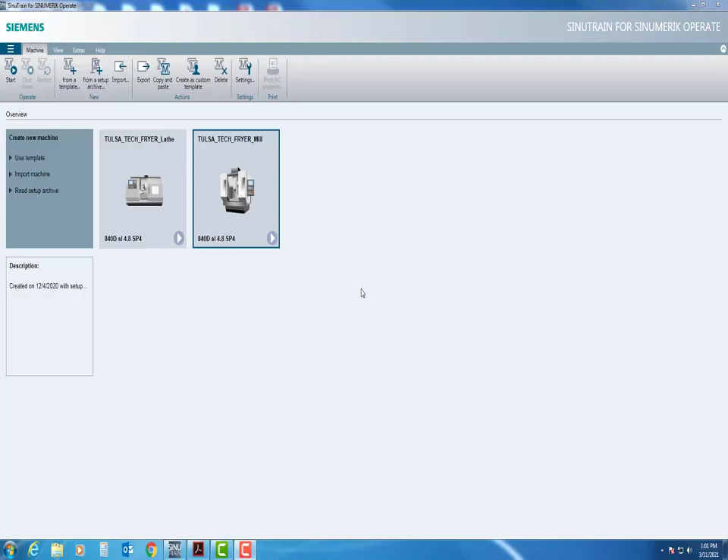Hi everyone, this is Aaron Ruck, and today we're going to go over how to use the Shop Mill Programming function on our fryer mills. This is how we're going to work towards getting our final stage in getting our Siemens certification.

We're going to open up our mill, and it will just take a second to load. To make this quicker, I've already created my tools - tool 1, 2, 3, 4, 5 - and I have the diameters right here. If you don't have this set up, that's fine, just make sure you have it set up before you start programming. If you have them labeled as different tool numbers, that's also fine. Just make sure whenever you go to start picking everything that you have them picked as the correct items - don't try to end mill with the drill, because it will do what you tell it to do.

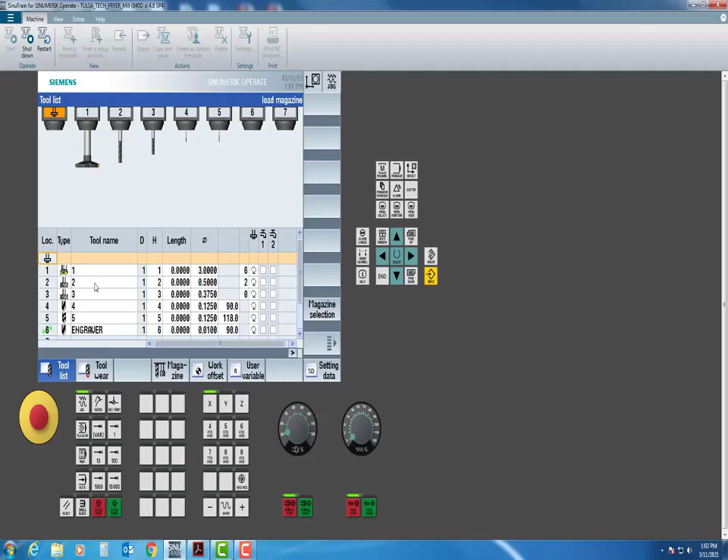Also, to help with the simulation, if you look at the work offsets, you'll notice all these lengths are 0. If I go into the work offsets, you'll notice I did put a minus 10 inches - I'm going to take these out. I'll show you why those are important later.

With that said, I'm going back to my program manager because we are ready to start programming. Remember, this is a shop mill, so this is a Siemens hand programmed program that we're going to be using. The first thing I'm going to do is create a new folder - we'll call this the name of my print, 8M, and we'll say OK.

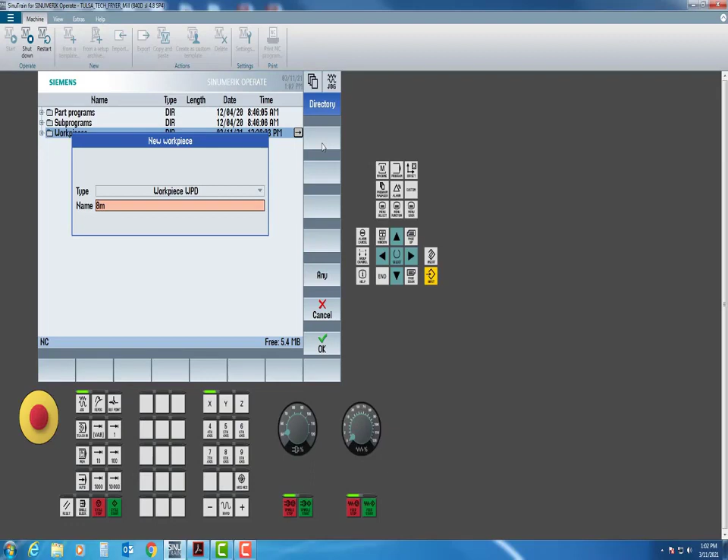Now if I look at my print, this is what we're going to be hand programming. 8M is what we're using, that's why I called it that. We've got several things we want to look at. The first thing we're going to do is build that material. If you'll note, I have 4 inch by 4 inch by half inch material, and the top of it is going to be minimum cleanup.

So this is what my part's going to look like right here, except if you'll notice on the front edge, I'm going to need to cut into the part right here and on the side, because that's what I want it to look like when it's completely done. I want to make sure all surfaces are machined. So back to my simulator.

If you'll notice, this did open up my material to make. I'm going to click on Graphics View, deselect it, and put these to 0 - it'll make sense a little bit later as to what's going on with those. But the first thing I want to show you is whenever I'm creating my block of material, I want to start off at X0 and Y0.

This is going to be 4 inches, that's going to be 4 inches, just like my print said. And then the top of my part is Z0, and the thickness of my part going down is going to be a half inch. Now if you put that as a positive half inch, that means it's going to build it this way, which means your simulation is not going to look correctly.

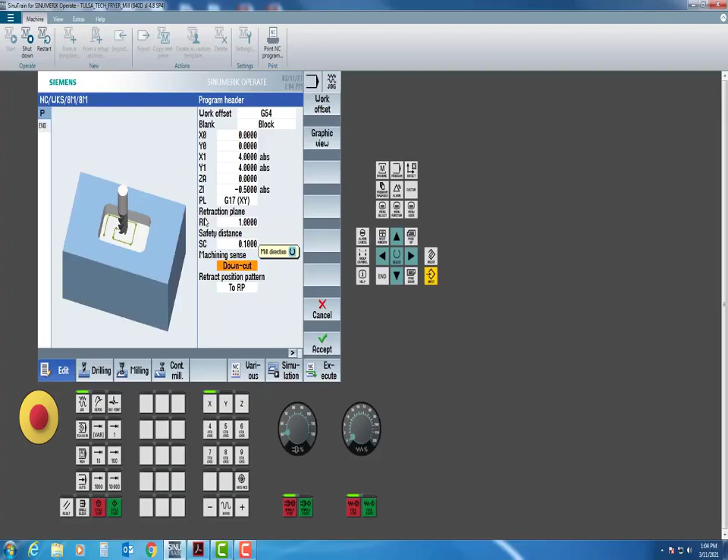So I'll hit enter. We are going to be using the G17. Retraction plane of 1 inch, safety distance plane is going to be 100 thousandths. We are going to be machining into the part, and we are going to use a retract position before going into a new location. So with all that said, I'll hit accept.

The first thing I want to do, if I go back to my print, is go ahead and face my part. And then after I face it, we'll go ahead and start working on the profile.

So we'll go back to my simulator, and then I'm just going to go up to milling. The first thing I want to do is a face mill.

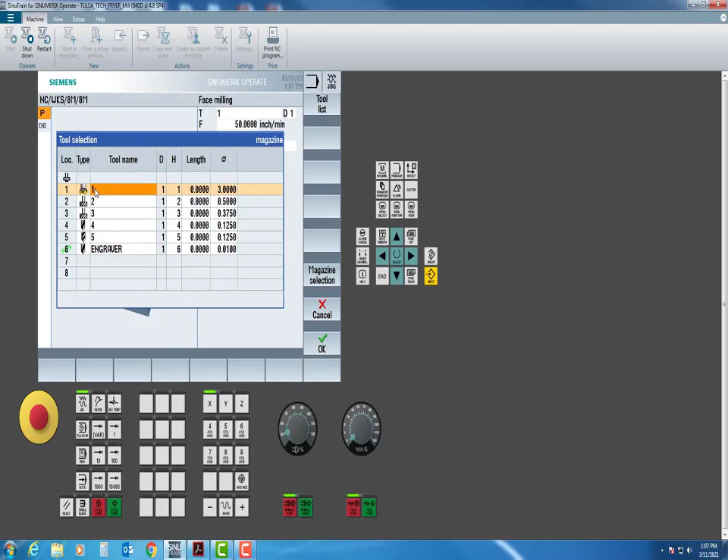Now when I click on these, a lot of this stuff is already going to be filled out. Whenever you open up yours, there's going to be a lot of default settings in here, so I will go through them as if it was set to default. So for this first tool, I'm going to hit select tool, and I want my facing tool to be what I'm using, so I'll hit OK.

I'll arrow down and I'll put that at 50 inches a minute. 3,000 RPM sounds pretty good.

Now right here, if you'll notice, that says finishing. Now if you have a lot of material to take off, you can do a roughing and have it step down so far. However, we are just milling to minimum cleanup, so a finishing pass will be just fine.

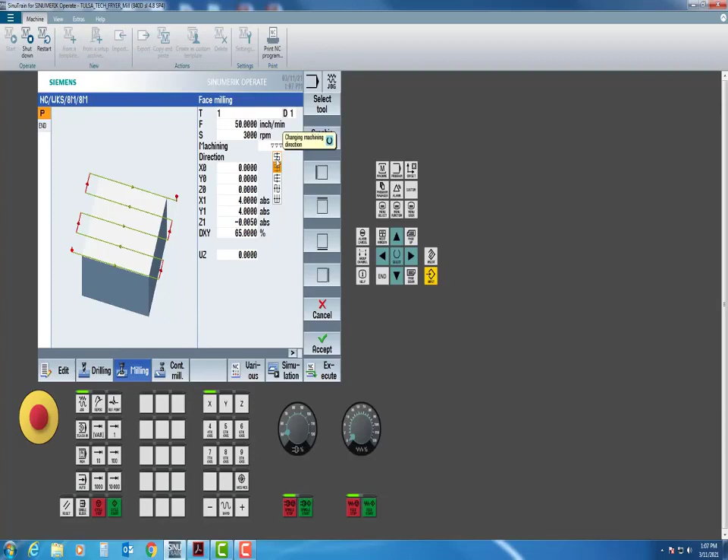Right here you can control how the tool paths look. So the first one that comes up will work just fine, and then I'll arrow down.

So right here, for the center points in X and Y, I usually don't change anything. For the Z0, I don't change anything. I let it know that the furthest point in X is 4, just like when we were setting up the material, and the furthest point in Y is also 4 inches.

If you'll notice, this will probably come up 0, and these will be red. So for example, you would see something like that. Well, with Z0 being the top of my part, for simulation purposes, I'm just going to make that minus 5 thousandths. So you notice that does go back to white because the machine doesn't have any logic interference.

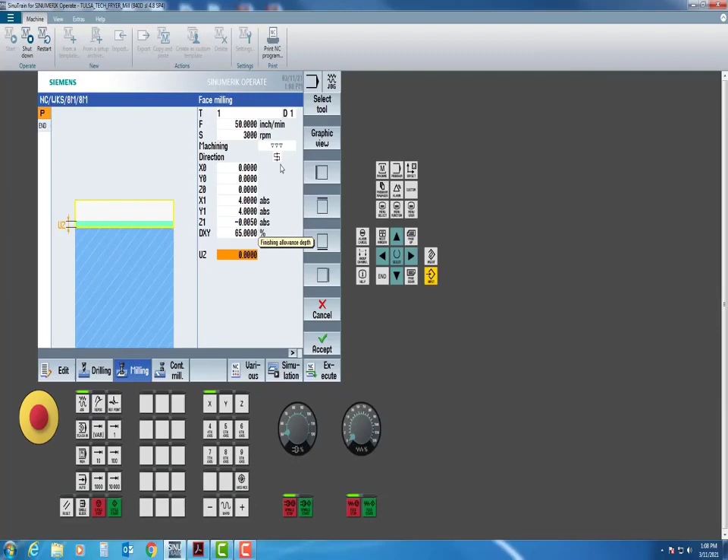It'll be doing a 65.0000 step over, or 65% step over, and I'll leave everything right there. So finishing allowance, I'm not worried about it because I'm going to finish it all at one time.

I will hit accept, and the first thing I want to do after I complete anything during this programming is I just want to simply simulate it.

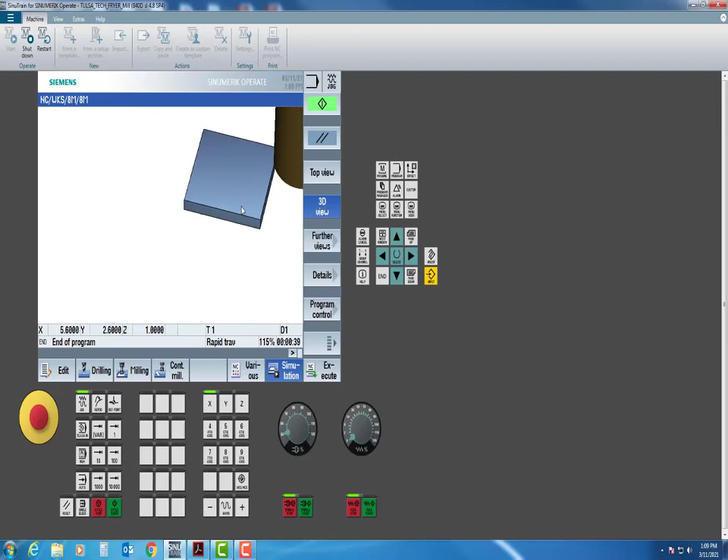So when it comes up, you'll see the part will come up in a top view. If you want to, you can click 3D view, and if you hold your left mouse, you can pan your part around. For your roller, you can zoom in and zoom out, and your third mouse will rotate your part. So you can do with that as you please.

I usually like to go into 3D view. When you're done with your 3D view, simply hit simulation again. So with that said, it's looking pretty good.

So if you haven't printed off this print, now would be a good time to do so, or ask for the print, because I'll be going through it a little bit quickly. I won't be coming back and forth as much, but just in case, if it helps you with keeping track.

And keeping up. So the first thing I'm going to do is I'm going to make this profile. I'm going to start at this location, and then I'm going to go step by step all the way around my profile. I'm actually going to tell the machine what each pivot point is all the way until my profile is closed.

So back to my simulator, I'm going to go into contour milling, and I'm going to create a new contour. And we're just going to call this a boss because that's what it is.

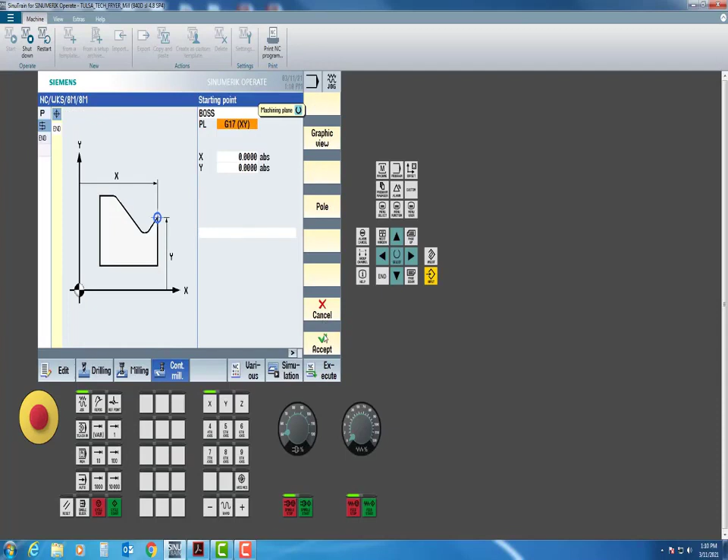And then I usually don't worry about the views for here. It's just going to let me know that my starting point is XY0. I will hit accept. If you'll notice, I am at the bottom left corner. That's my 0 and that's my 0.

First thing I want to do from that position is I want to go up in Y 3 inches 937 thousandths. And then I'll simply hit accept. So if you'll notice, it put me up that high, and that's how we're going to do this all the way across.

So this next point, we'll go 3 inches 937 thousandths. But if you'll notice, there is a radius there.

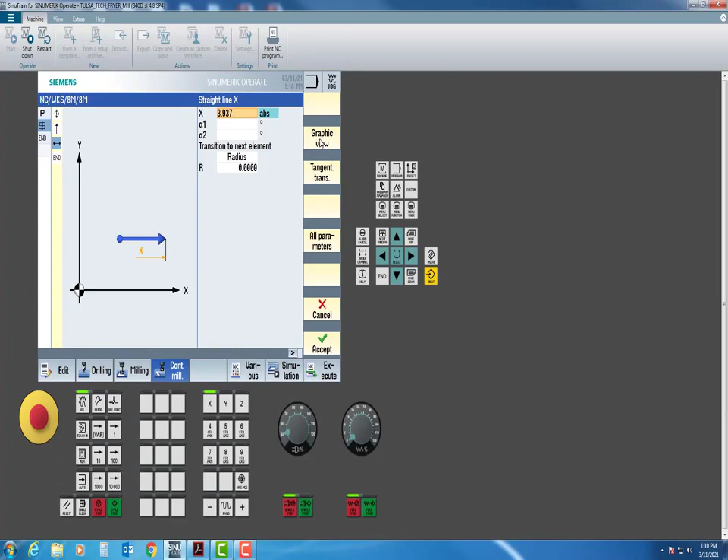So this is what's cool about hand programming on a simulator, is I can subtract 1 inch 181 thousandths and hit enter. And then when I go to accept it, you'll see that it did stop it short of the amount that it needed to be stopped. It went to 3 inches 937 thousandths and then subtracted 1 inch 181 thousandths, which gives me this current location. I like that, so I'll hit accept.

From here, I'm going to be doing a radius. Now, if you'll notice that this is not the radius I want, that would be a counterclockwise, and I want to go a clockwise direction. So simply click on this, select the right location, and I'm going to do this a certain way. There's more than one way to do it. This is just the first way I'm showing you guys, and I find it to be the easiest for what we're doing.

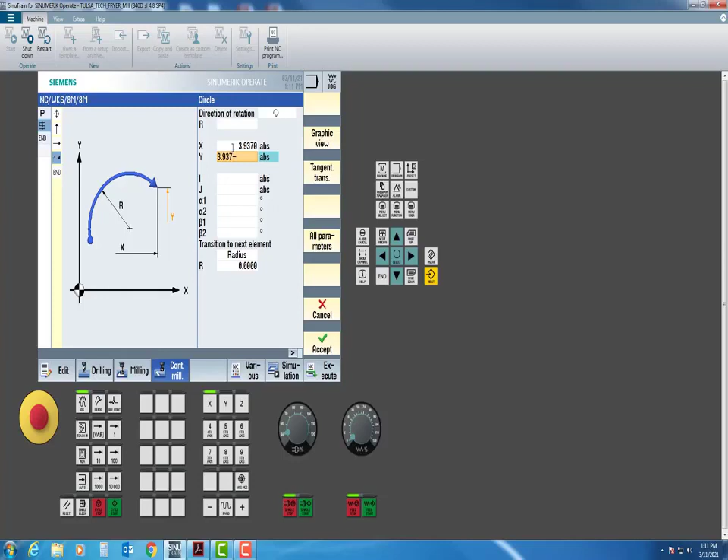I'm going to come right here and say 3 inches 937 thousandths is where I'm going to end at. Right here is going to be 3 inches 937 thousandths. Again, I'm going to subtract the radius and then hit enter.

Now nothing's going to show up until I hit that right there. I'll click on graphics view, that way it will show me that it does this radius. Until I hit that, it just puts my location right there. That's my end location, but by hitting my tangent, it swings that radius the correct direction to the correct position.

So I'll hit accept, and I'm going to move down. Again, I'm going to move to 984 thousandths plus that radius of 312 thousandths. I'll hit enter. So from here, I want to do another radius.

Go the right direction. I'm going to type in my endpoints. My endpoint X is going to be 3 inches 937 thousandths minus 312. Now this will be 984 thousandths. And then when I hit tangent, it does swing it.

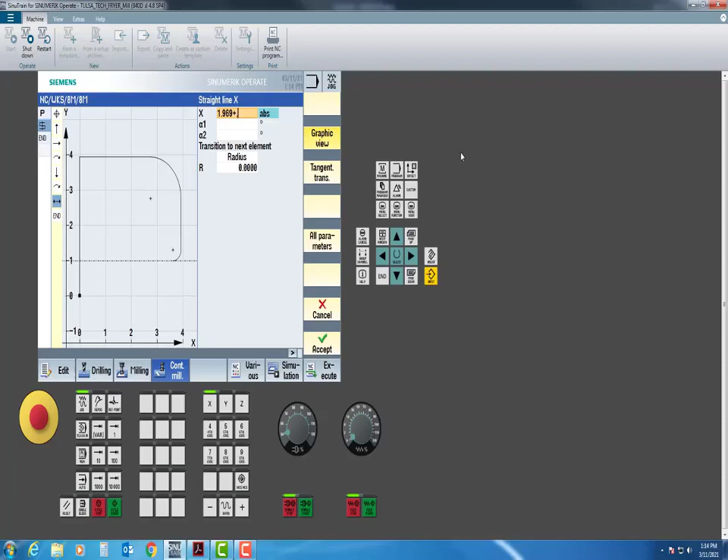Now from here, I'm going to go 1 inch 969 thousandths plus 0.312 thousandths. Enter, hit accept. And now this time, whenever I swing it, it is going the right direction. So I will simply put in the 1 inch 969 thousandths, and then the Y will be 984 thousandths subtract 312 thousandths, and you'll see it puts my endpoint right there, and when I hit tangent, it does swing it all the way down.

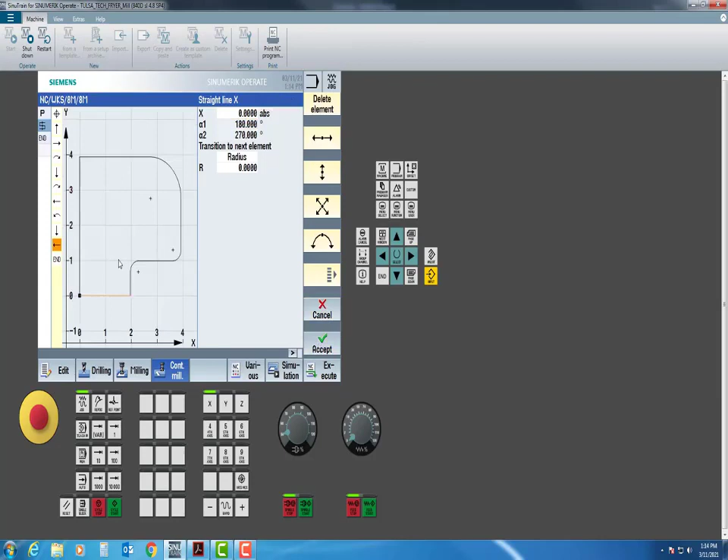And then from here, I'm just going to go back to Y0 and X0. And if you'll notice, this has done my entire profile. So from here, I'm going to hit accept because I have finished my boss.

Now that I have a contour, I want to go ahead and create a tool path. So path milling - I'm going to be using a tool, so I'll select tool number 2, which is a 1/2 inch end mill. And then I'll come down, 50 inches a minute looks just fine. 4,000 RPM sounds good. Now right here, notice how it does have the finishing symbol.

I want to use this for roughing. I do want to be going forward. Now keep an eye out for this right here - this radius compensation is to the left of the line. You have several different options.

I'm doing the profile, but if I wanted to cut on the inside of the line, I would select that right there. So by default, it comes up using this symbol, which will cut on the left side of the line. So my Z0 is the top of my part.

My depth of my profile, if we come back and look at it, says 150 thousandths deep. And then I want to take 50 thousandths depth of cut each time. I'm not worried about leaving anything for the finish allowance.

In Z - now on the plane, for leaving finish allowance on the sides, I'm going to go ahead and leave 10 thousandths. That way it gives me a nice finish cut, which is really easy to program because we have this ability. So I've got an approach point.

Now keep in mind, this approach point means it's going to start 500 thousandths off to the left, and then when it retracts, it's going to come off again 500 thousandths off to the left, okay? Or down, possibly, whichever one that default selects right here. Now keep in mind that this will have to be changed later on, and I'll show you why. It won't have to be changed in this path, but it'll be changed in something else.

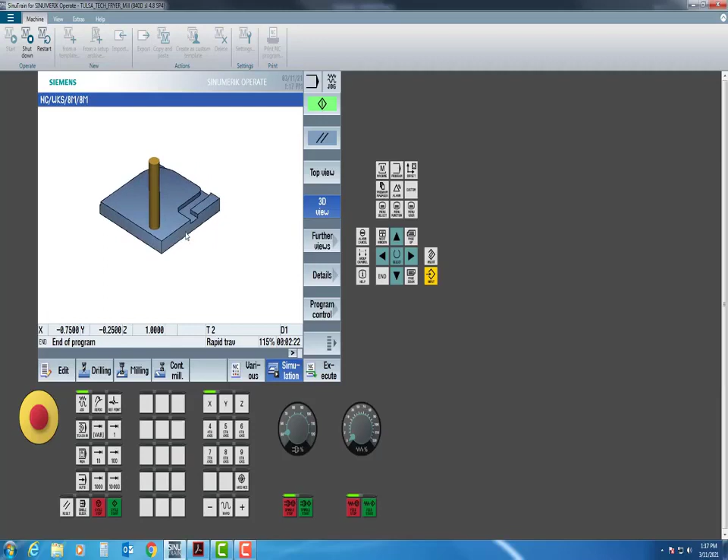Now of course it will simulate the face, and then it will start simulating that boss. One thing I want to point out is that it does look just like the blueprint. It is not cutting on these sides. However, I must have machined surfaces all the way around the part, and I'll show you why what that's going to look like here in a minute.

So I'll move that back to the middle. I'll turn off simulation. Now if you noticed, I'll turn this on one more time so I can point out what I'm looking at.

If you look right here, I have some material that's been left over from that end mill, and a big chunk of material right there—I'm going to call that excess. So I need to make a toolpath that will get rid of this excess material.

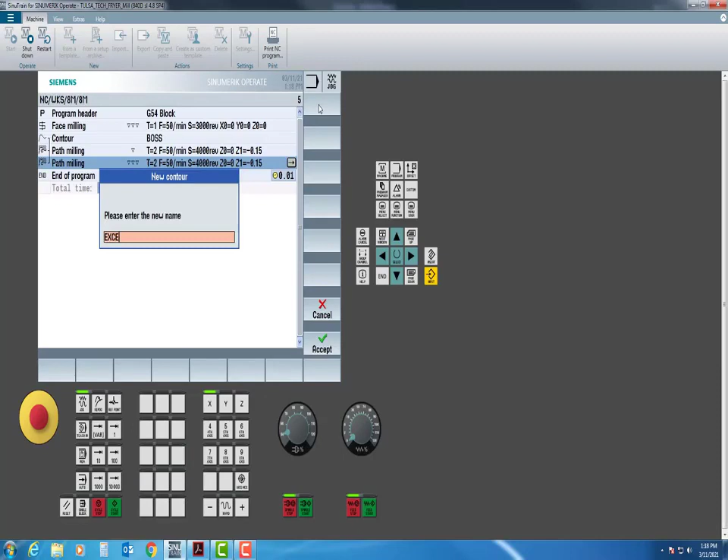Click off of simulation. I want to go to contour milling. I'm going to make a new contour, and then I'm going to simply select excess. We'll call it that right there. Notice how it wants to start right there at the bottom left.

However, I don't want to come down at the bottom. Looking at our blueprint, I'm going to tell it to come to X 4 inches, and I want it down right here because I don't want it to come down on top of the part. The goal is for my toolpath to come up, over again, far enough because I'm going to move up here to click that off. I'm going to put my tool right over the top of that right there, and by doing that my tool by default will take that off.

So we'll come back to our SinuTrain. My starting location is going to be 4 inches, and I want to start at -1/2 inch right there, so that way I know my tool will be completely off the part. I'll hit accept.

So now that I have my starting location, there's my home. There's my starting location for this new profile, the new contour. I'm simply going to move up, and it's up to you to figure out the numbers—I'll let you figure it out.

I'm going to come up to 300 thousandths, and then I'll hit OK.

Now here's something that's cool. Usually what I do is I'll type in these locations because they are known locations, and then I'll subtract half the diameter of my tool, or a little more. That way it puts me in a good spot—there's no guessing, I know what's happening.

So again, I'm going to come over 1 inch, 969 thousandths, plus I know 250 thousandths is half the diameter of my tool, so I'll go 300 thousandths. That way I'm 50 thousandths away from actually cutting that profile that I just made. That might sound confusing right now.

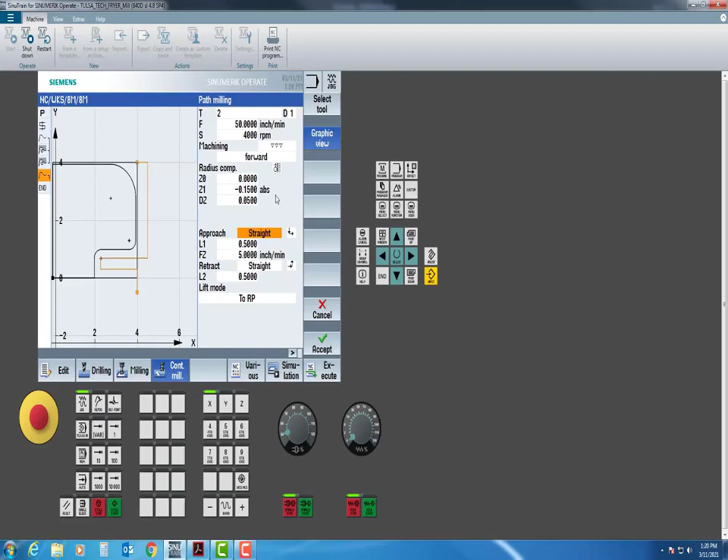We're not going to change anything right now. I want you to see what it looks like if I don't change that symbol. I'll hit accept, and we will simulate. Again, the first thing it will do is my facing, and then it's going to do my finished pass.

If you notice right there, it's cutting way far into the part. Now, it's doing that because I told it to cut on the left side of the line, so by doing that it goes further than what it's supposed to. This is an easy fix.

I will go back to what I'm doing. I can either hit the right arrow on my keyboard or I can click on it—I didn't cover that earlier. But now I don't want it to stay on the left side of the line. I want to do center line programming. So I'll select that, and I'll hit accept.

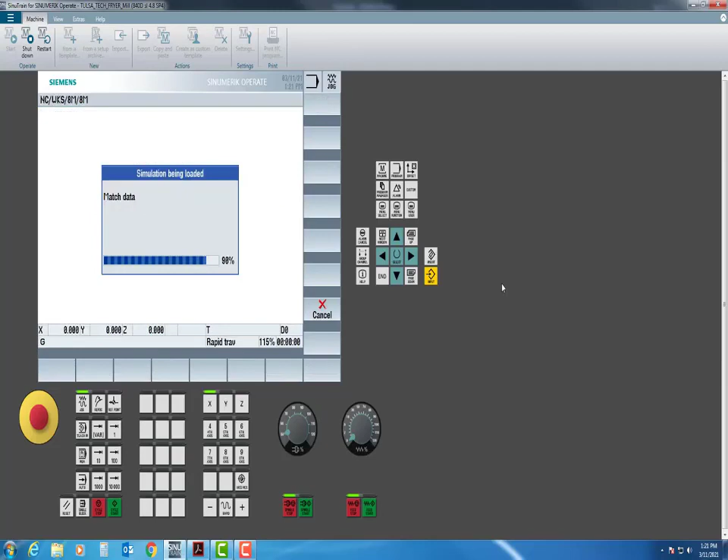So this time it will not be cutting on either side of the line. It will be cutting exactly where I told it to go. So it's going to do its finished pass.

And just like that, it's cut it all away. But if you'll notice, it did two more things: it did not cut everything right there, and it did cut into my profile. So we got one more thing to look at.

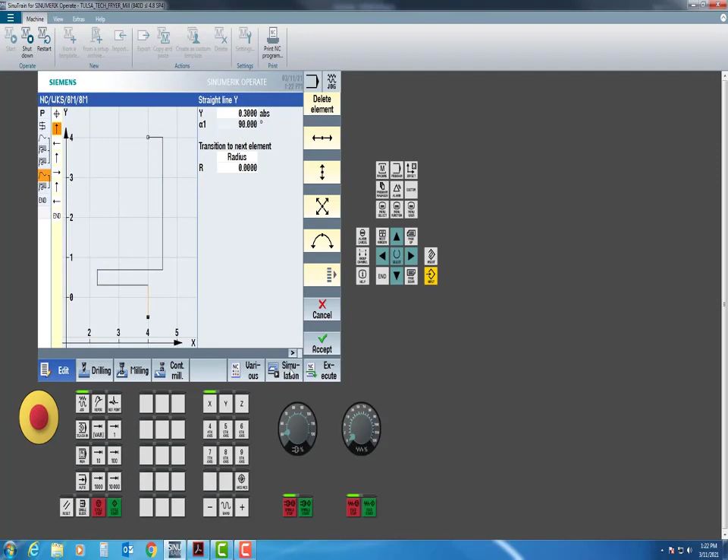So I'll hit simulation again. On this contour, this first move, I'm going to arrow up to each point of the contour. That first move was 300 thousandths. Remember, it's a half-inch tool, so 250 thousandths is half the diameter. So if I move 300 thousandths, that lip we left was 50 thousandths thick.

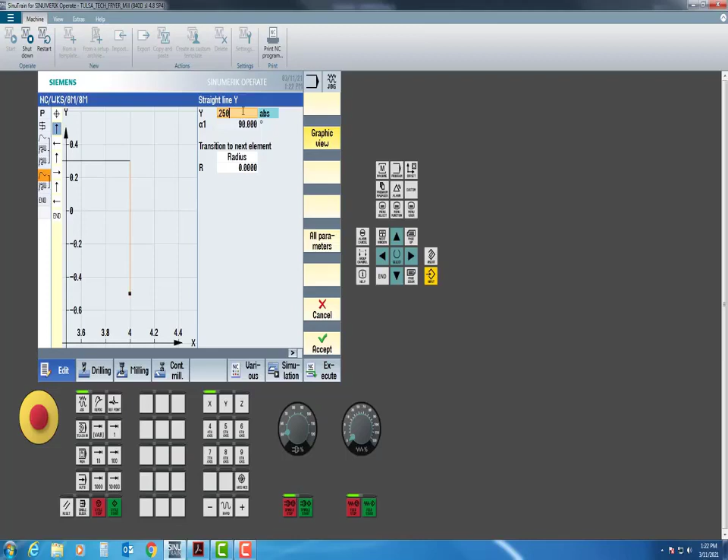Easy fix. I'm going to come in here and also make that 250 thousandths. If you wanted to, you can make it 200, or anything less than 250 thousandths, and that would work just fine. Okay, so that looks really good.

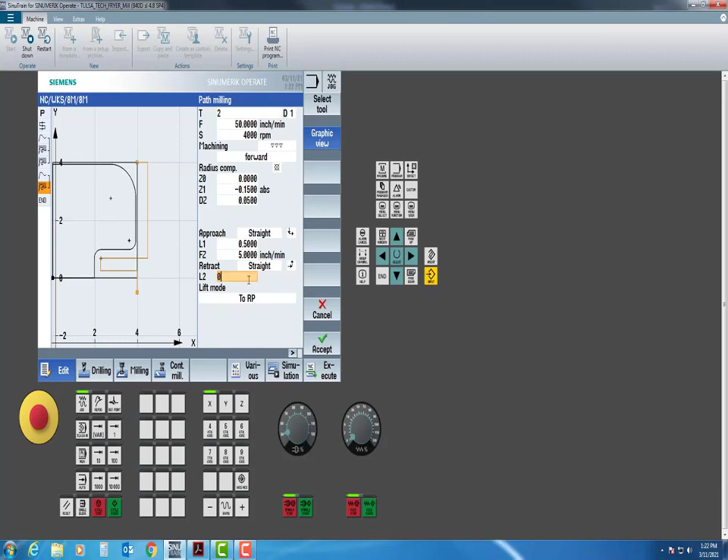Now the next thing I want to point out is it cut the top of this profile right here. Remember I told you about that approach and retract. What's happening is it's completing the move, but for the retract out, it's moving an additional half inch to the left. So all I'm going to do is make that a 0, hit accept, and let's simulate one more time.

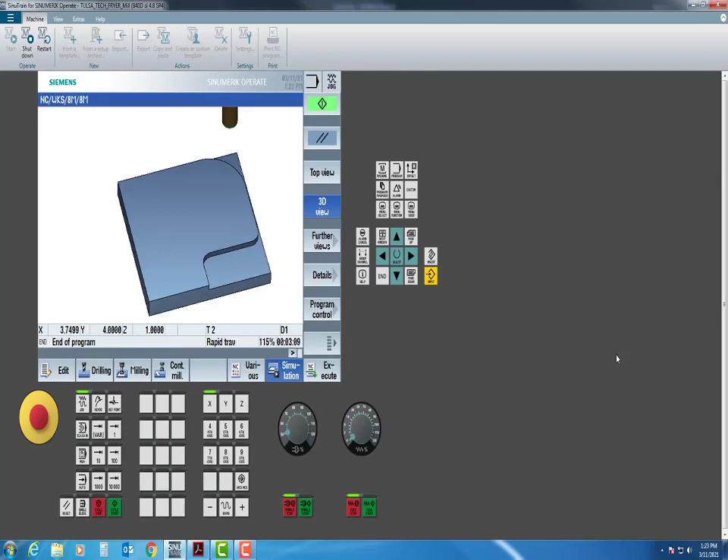When you are making your parts, you will run into a lot of miscellaneous functions or errors. The key is understanding how everything works on your simulator. That will help you define your profile and get everything working just fine.

Alright, so that looks really good. It's not cutting into it. Now the next thing I told you is that I want to cut all the way around the profile.

So I need it to cut into here. On my setup, I usually tell people to go in about 30 thousandths on both sides. That way I can keep 30 thousandths clean up over here and over here, so it keeps everything nice and even.

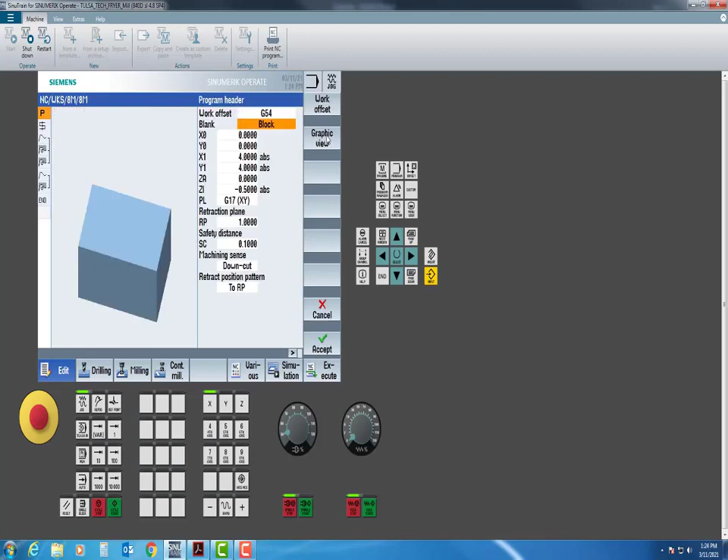But to do that, I'm already pretty far into my programming. So I'm going to come all the way back up here to my block header, and what I'm going to do is move my material down and to the left of the starting point. Keep in mind, this corner, I have it programmed to X0. So imagine that profile being inside here — I am moving this block of material down and to the left of that starting point.

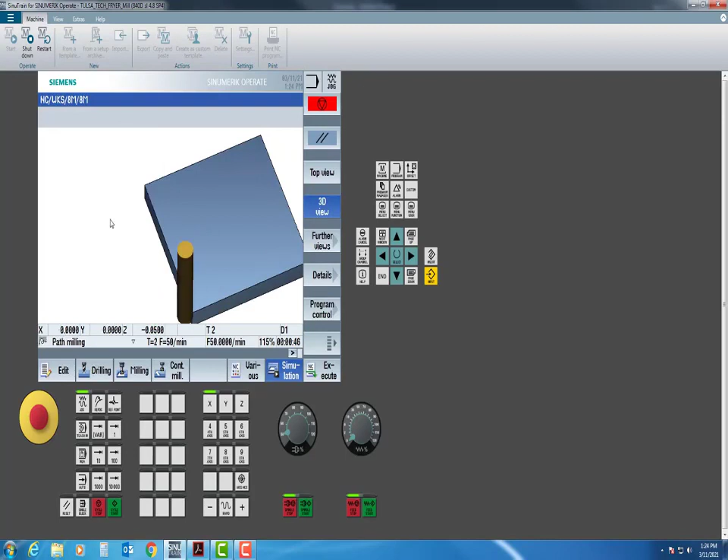So I'm going to hit accept, and I'm going to simulate one more time, and you'll see what that does. So now you see, the profile has not changed, my paths have not changed, and it cuts on both sides right here.

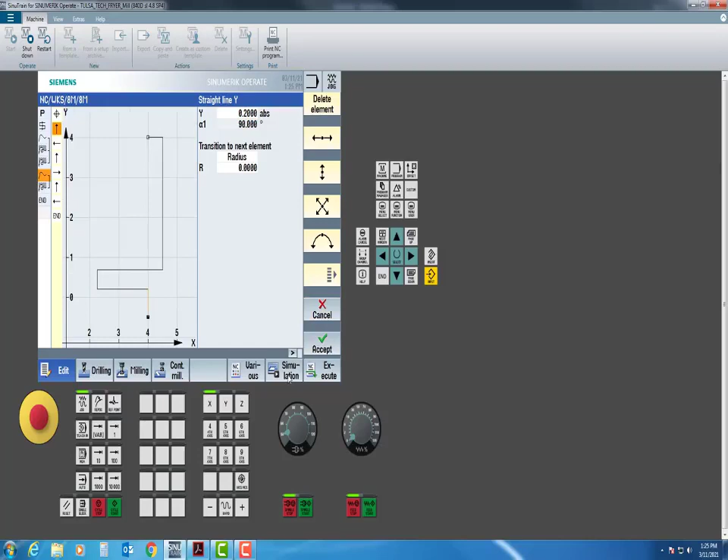And again, anytime I change something, I want to simulate it. This will help prevent frustration later on in the program if you get everything right step by step. So again, I am cleaning up right here — my excess now takes off everything on the top and bottom.

Now, the reason why I have so many of these errors in here is because I want you to see what an error looks like, and I want you to know how to fix it and see that it doesn't take very long to fix it. So we're done with the profile and the facing, and we're not that far into it.

So what I'll do is move my cursor where I want it to be, and I'm going to make a pocket. From here, I'm going to click Milling, Pocket, and I've got this square right here, but I need to put it in the right location. Again, we're going to go to Simple, select the tool — it's going to be tool number 3, our 3/8 end mill. And 30 inches per minute looks good, 6,000 looks good, and I'm going to change this to a roughing.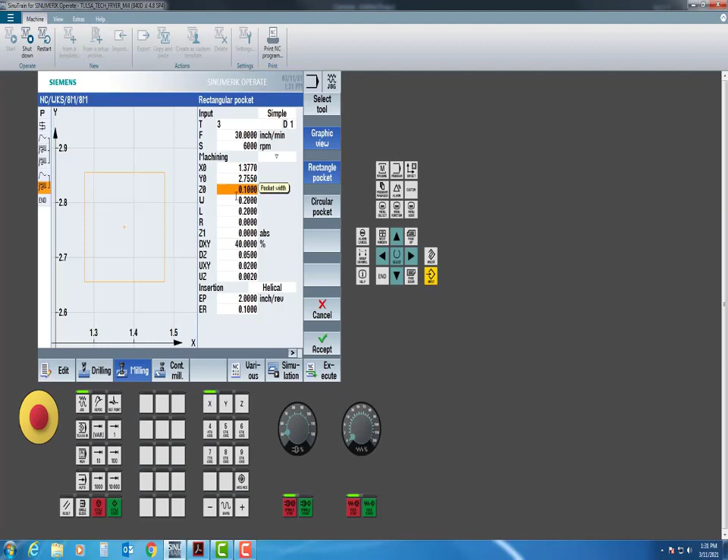So the first thing it wants me to do is put in those locations. This location is going to be 1 inch, 377 thousandths, and on the next one, 2 inches, 755 thousandths, and that has my location. Then from there, I'm going to put in my Z0 at 0, because that's the top of my part. Now the width of this pocket is right here at 1 inch, 968 thousandths and 5/10.

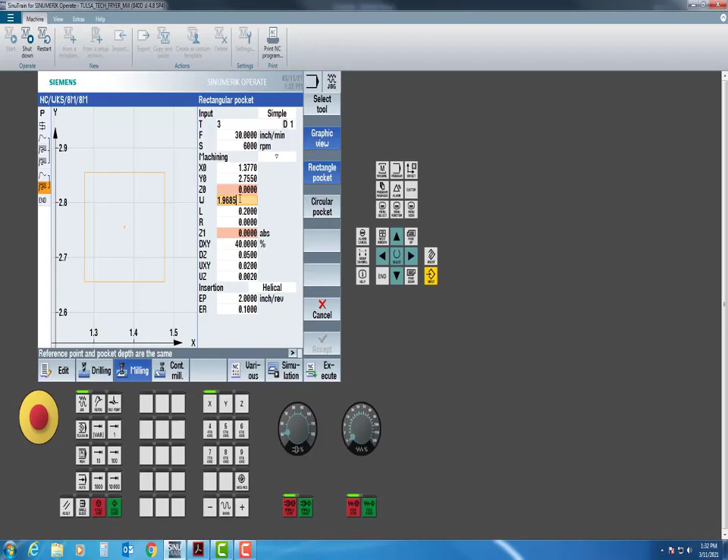So we'll type that in because that is the length and the width. I'll type in 1 inch, 968 thousandths and 5/10, and again 1 inch, 968 thousandths and 5/10.

Now you can see on the screen it looks really good. It actually positions it where it should be with the graphics view selected. So from here, I want to tell it how far deep to go.

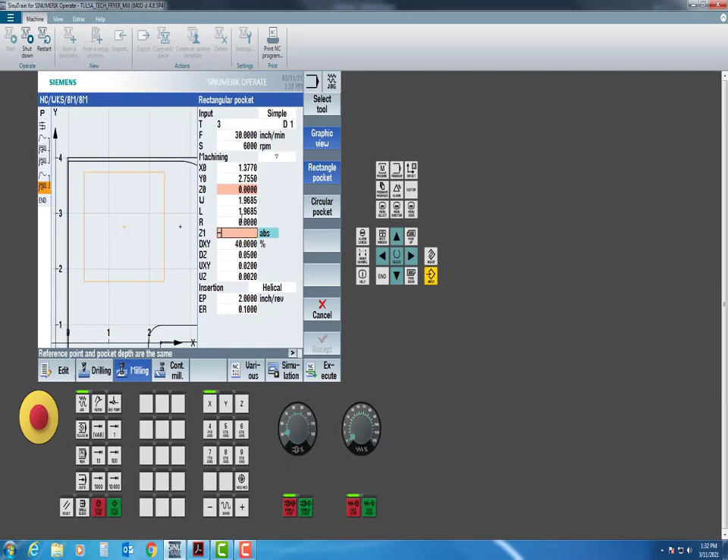I have a radius on there, but I'll come back to that in a second. I want this to be minus 196 thousandths, because if I look at my print, that's how deep the pocket is. Now also on the pocket, I can put a radius on all 4 sides, and in this case it's going to be 312 thousandths. So if I click on the radius, 312 thousandths right there. So now I have my positioning, my length and my width, my radiuses, and my depth.

From here, you'll see that I'm taking off 40% of the cutter on the step overs. I'm going down 50 thousandths depth of cut for each pocket pass. I'm going to leave 20 thousandths along the walls, and 2 thousandths on the floor.

Now here's where you can have some fun if you want. I've got a vertical zigzag, I've got a helical zigzag, and I've got this last one. I'll let you guys look at that and see what you think about it. But I'm going to use the helical. I've got 2 on my inches per revolution, on the pitch, and then I've got 100 thousandths on the helix radius.

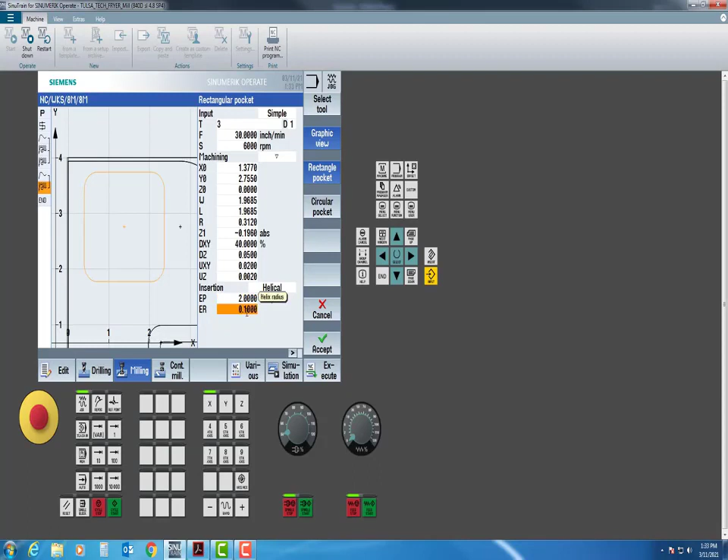Okay, so I'm going to hit accept and simulate. Now of course, unless you've changed anything, your facing and your profile should all come out looking just fine.

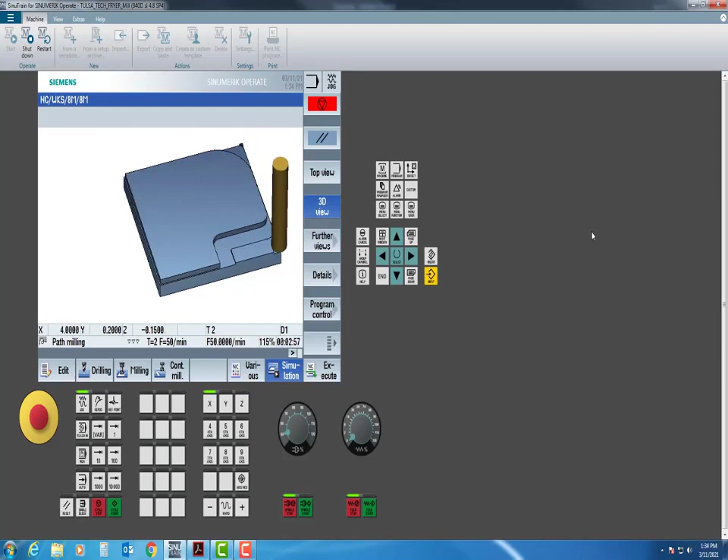I'll make sure that I am still profiling around the outside. I'm cleaning off the excess, and now my pocket will start. That is a 50 thousandths depth of cut each time, so it will do it 4 times. Should be number 3. And on the 4th one, right there. So now you got to remember, pocket's not done yet because we just roughed it out.

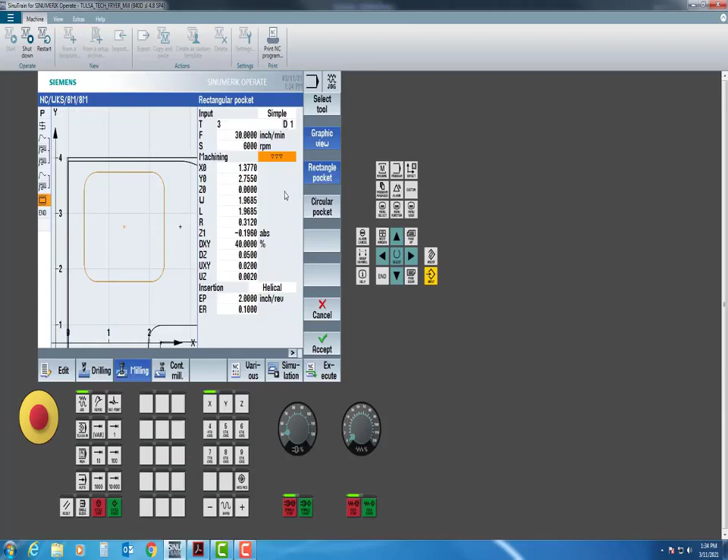So I'll click on simulation. I'll simply come back to rectangle, and then I'll click on here and I'll click finish. Now when I click on finish, all I'm going to do is hit accept, and now these two are tied together. So I'll hit simulate.

And if you want to, you're always more than welcome to speed up your simulation. I've got it at 115%. If I go to 120, it will go so fast that we can't see what's happening.

So I've got my first pocket depth. Should have the second. And then I've got my 4th pocket depth. And then I've got my finished pocket depth. And on the finished pocket depth, you can make it go 50 thousandths at a time, or you can go ahead and just make it do all of it at once.

So that was my rough and finished pocket. And now I have left, if we look at our print, is I'm just going to do these holes. Now these holes, when I make them, kind of look funny, but it's going to work out really easy.

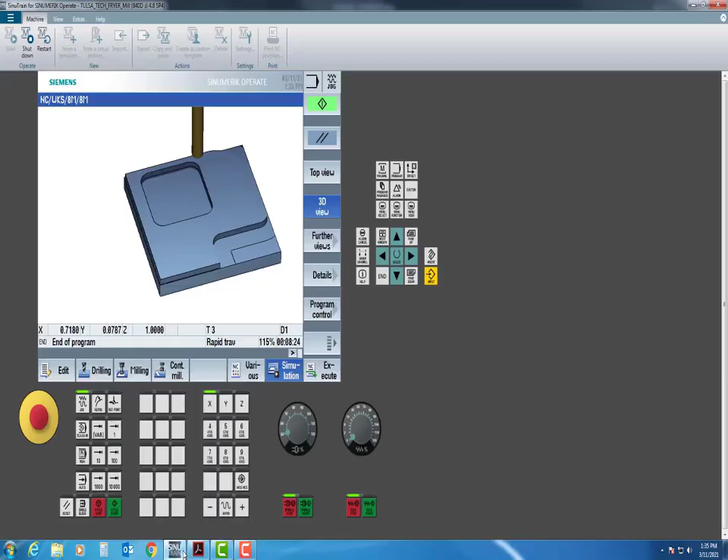So I'm going to hit simulation because I'm done. And then I'm going to come up here to drilling. Now the first thing I want to do is make a centering drill. I'm going to select tool number 4, which is my center drill.

Now you have two ways of doing this. You can click on diameter or you can click on tip. I usually like to click diameter, and then I tell it to make the diameter smaller than what the hole is. So if we look at our print, it says the diameter is 125 thousandths. So anything smaller than that is going to work out just fine.

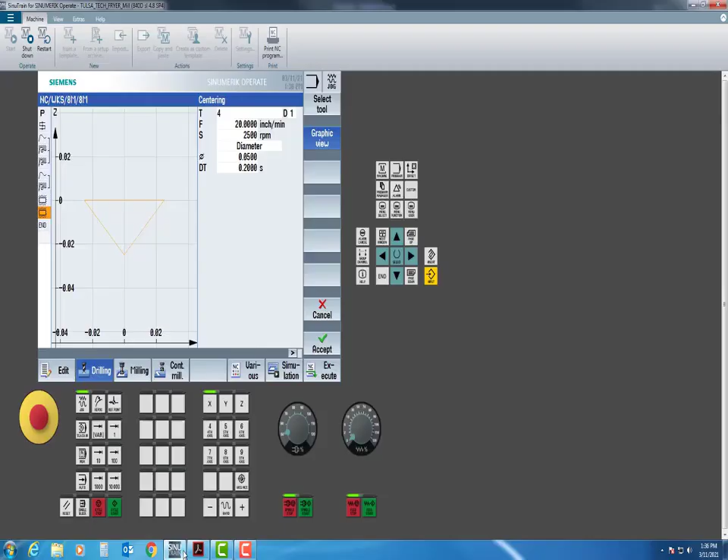If you want the centering drill to chamfer the hole, you can always make that bigger, so that way the holes at the top of it will have a countersink. But for this case, I'm just going to make it 50 thousandths. And then I've got right here the dwell time. I just leave it as default, and I hit accept.

That's done, but I'm not going to hit my pattern yet. I'm going to set up my drill. So on my drill, I'm going to select my tool, which is going to be tool number 5. And then I'm going to come down to inches per minute.

I'll leave it at 2,000. Now here it has shank and tip. So what that means is how deep the hole is going to go.

If I leave it at tip, let's put this at a minus 300 thousandths and we'll look at this real quick. You'll see the tip is right at 300 thousandths negative. But if I change it to shank, you'll see the diameter of the hole is 300 thousandths deep.

If I look at my blueprint, it says it wants the diameter to be 125 thousandths, diameter 196 deep. So it wants that diameter that deep. In this case, I will be going with the shank and not the tip, and it did say minus 196 thousandths.

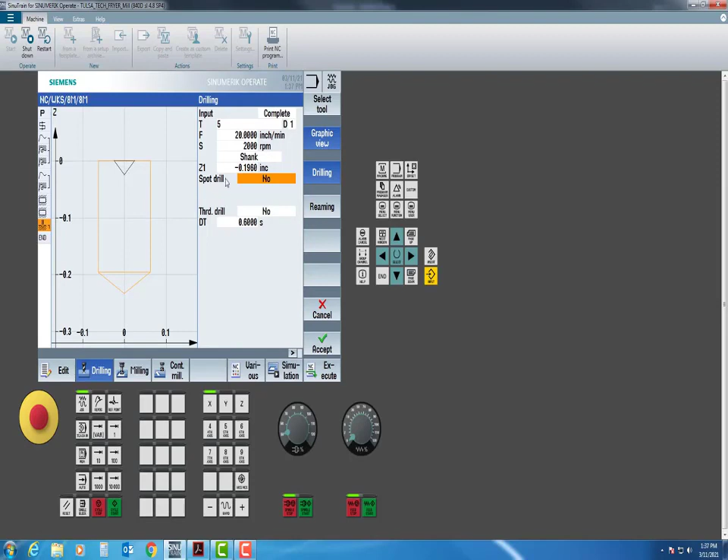So I've got my center drill, I've got my drill. If you'll notice, the shank of it is almost at 200 thousandths, just shy. And then I'm going to hit accept. At this point I've got a center drill and a drill. Now I can tell it how I want to do it.

So I'll go to positions. I have different ways I can do it. I'm going to select this one right here, which is my bolt hole circle. Now I did have this default set, so I'll go ahead and go through what it means.

So I've got this Z position right here. Now this is not the top of the part. This negative 196 thousandths is how deep it is from the top of the part to the bottom of the pocket. Now if I make it 196 thousandths deep, there is a chance that the tip of my drill is going to go across the top of my part.

But if you remember at the very beginning, there is a retract plane of 100 thousandths. So you do want to program it right to negative 196 thousandths. Don't think you're going to scratch across the top, because we've set it up with that clear plane or retract amount, so it will clear. That might sound like a lot, but all I'm trying to say is program it exactly the way it shows on your print. So the center is going to be the same location as the pocket center.

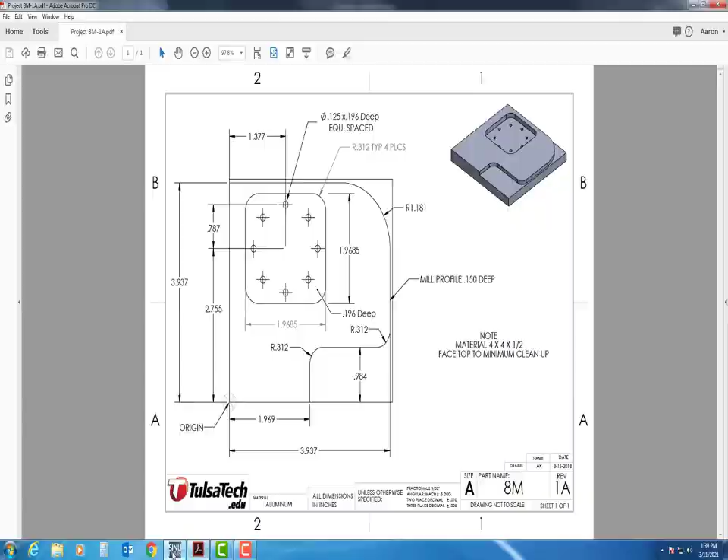It's going to be 1 inch 377 thousandths in X, 2 inches 755 thousandths in Y. I have a 45 degree angle, and the radius from center to center is 787 thousandths, which is put right there. Then I have the number of holes, which is going to be 8. Right here on positioning, I usually leave it straight because that's just how it goes from one hole to the next. I'll hit accept.

Really easy to set up. I have no red anywhere on my screen. I will simulate and see what it looks like.

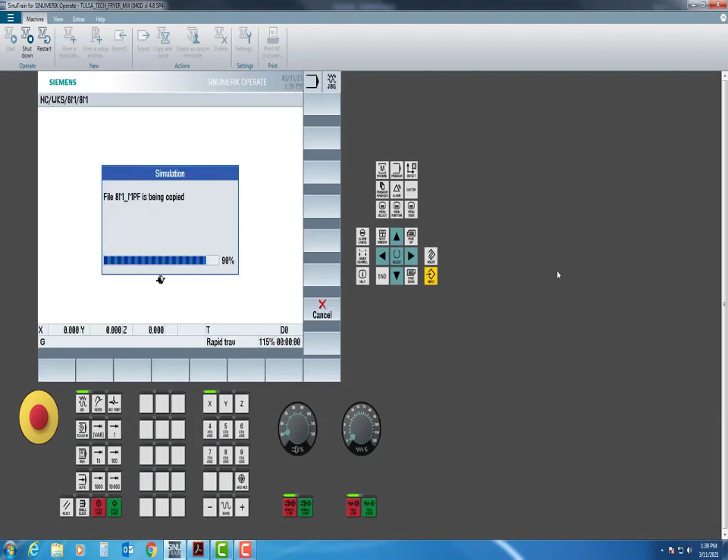So once this gets done simulating, if everything looks the way we want it to look, then in not very much time we have gone through and generated a toolpath for our facing, our boss, our pocketing. We also generated a toolpath for getting rid of the excess material left from our boss, and we also got our drilling.

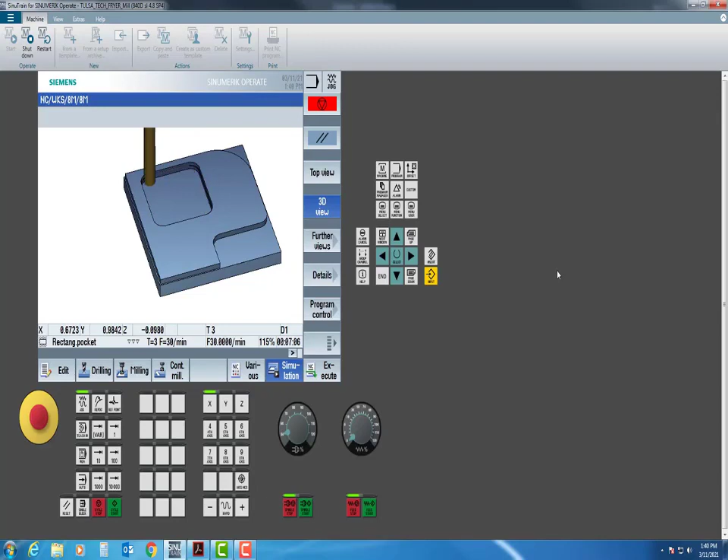So if we watch this, after the finishing passes on the pocket, it should come in and do our spot drilling, just 50 thousandths diameter, and then it comes through and will drill all the way in there.

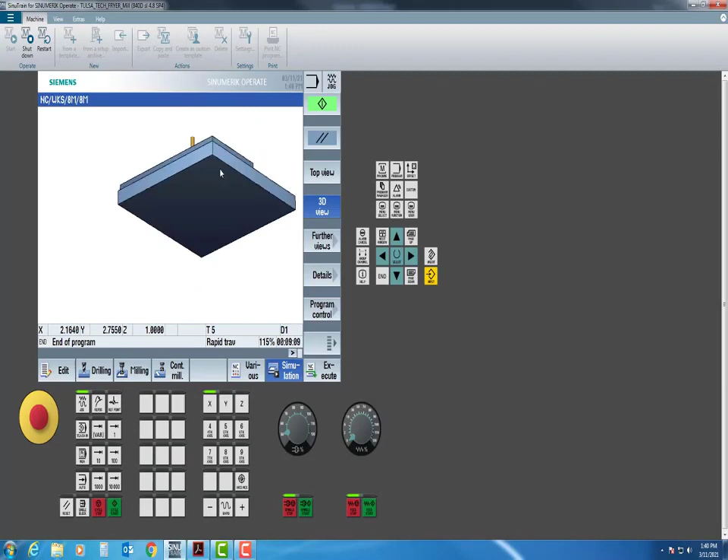So with that said, looking at my part, you can see my holes don't go all the way through, which they shouldn't. I cut all the way around the part, and everything is in tolerance.

So with that said, all I would have to do at this point is set my X and Y zero on my machine. I would set my Z zero, and then I could simply select execute. From that point in time, I would hit cycle start, and it would go through and actually start cutting everything. However, I don't have anything set up, and this is a simulator, so it won't work.

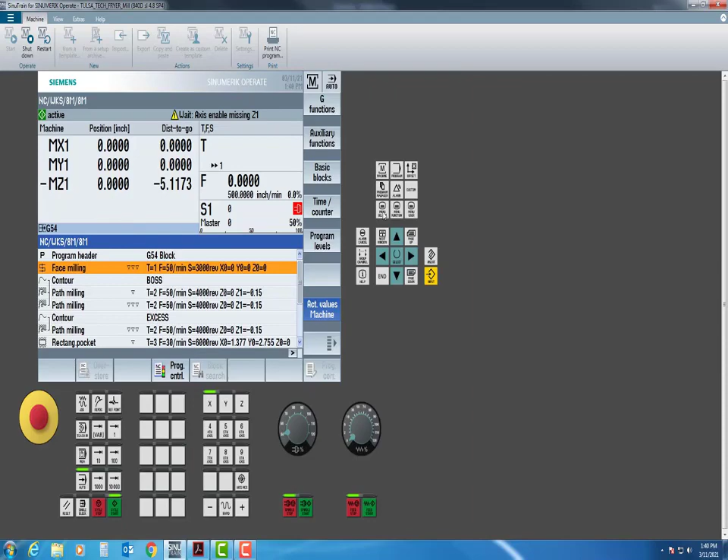All I would have to do is just put this program on my USB and take it out to the machine. Or if you're already on the machine, you can simply set up your work offsets and tools and hit cycle start.